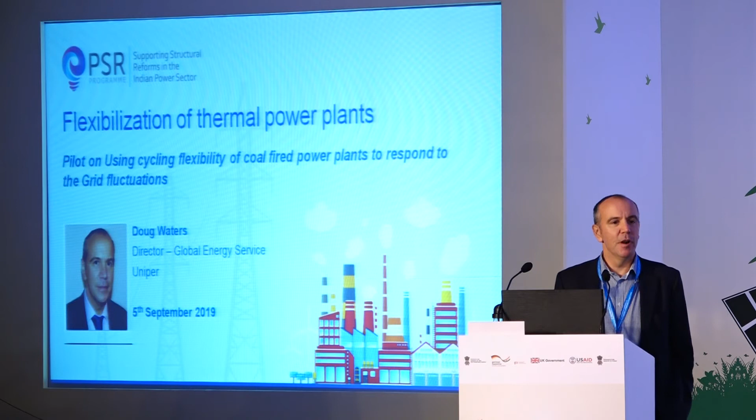Uniper is a power generation company, slightly different to some of the other people on the panel. We have about 40 gigawatts of power plant spread across Northern Europe and Russia, and we've seen a lot of these things happen over the last 15 years. I've personally worked in power stations that have gone from base load to 200 or 300 starts per year. I'm going to summarize some of the things we've seen and also the work we've been doing in Andhra Pradesh on this topic.

With KPMG and through the UK DFID organisation, we've done some work on how to improve the flexibilization of coal plants in Andhra Pradesh, so we have an ongoing program there. I'll describe the work we've done there and Uniper's experience in flexibilization, then what we did at a particular power station in Andhra Pradesh and some recommendations to deliver flexibility, which is now moving into the implementation phase. Finally, KPMG, who lead on the market and policy piece while we lead on O&M and engineering, have come up with some policy and regulatory enablers to make flexibility happen.

A very quick overview of the situation in Andhra Pradesh: it's one of the highest renewable intensive states in India. This graphic shows it's at the top end of India in terms of renewable penetration, which means some coal plant is going to have to flex there before other areas.

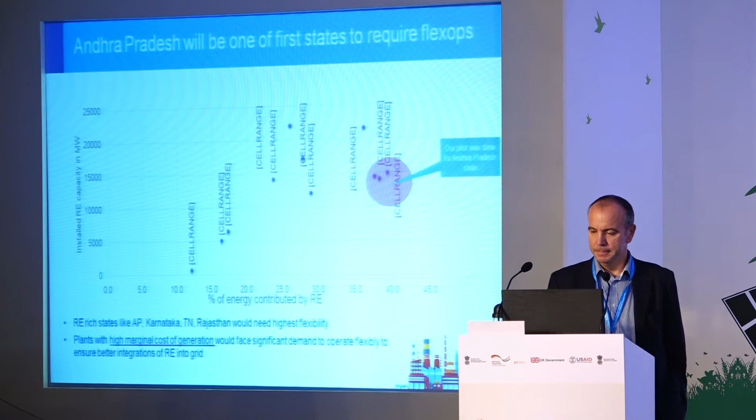KPMG did quite a big market study looking at what was going to happen. There's going to be some increase in thermal capacity over the period, but a significant increase in renewables across the period considered. What the model does is calculate the residual demand shape for the thermal assets. It doesn't look to curtail renewables; it looks to meet demand by putting all the renewables on and then meeting the rest by coal.

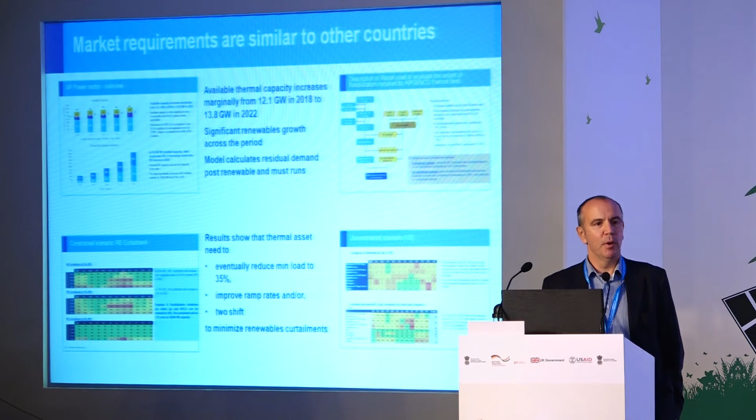What that showed was that the coal plants are going to have to reduce their minimum load eventually down to 35% - not immediately, but as more renewables happen, they need to go further in that direction. They need to improve their ramp rates to meet that duck curve profile you saw earlier, and ultimately they're going to have to start two-shift operations, so daily cycling. That's the market requirement they came up with, and there's lots more in the information pack you'll find after this.

So just a bit about Uniper and its experience in FlexOps, which is why we got involved in this. I've worked at a number of power stations and all of them have eventually had to lead to flexible operation. When you run a power plant, these are some of the things you start to think about: what damage am I going to do?

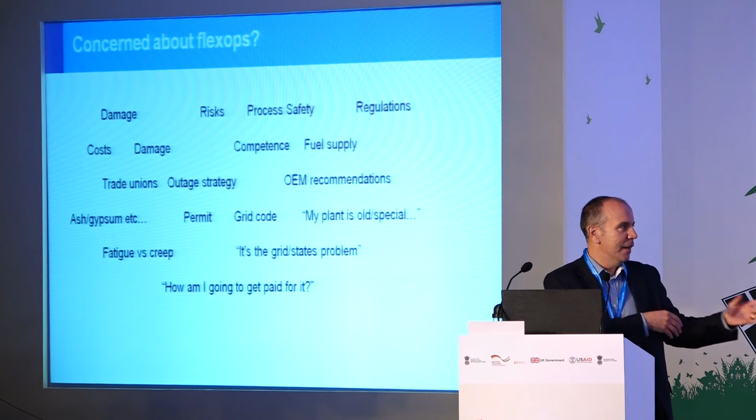That's where the EPRI guys do a lot of work on the material side. What risks am I going to put myself into? As Nilesh said, there are new risks coming along with this. What are my process safety risks, because I'm asking this thing that was built to run base load to do something it wasn't designed for? What's it going to cost me? What's the damage going to be? How good are my people? What's the grid code going to require? And ultimately, how am I going to get paid for it?

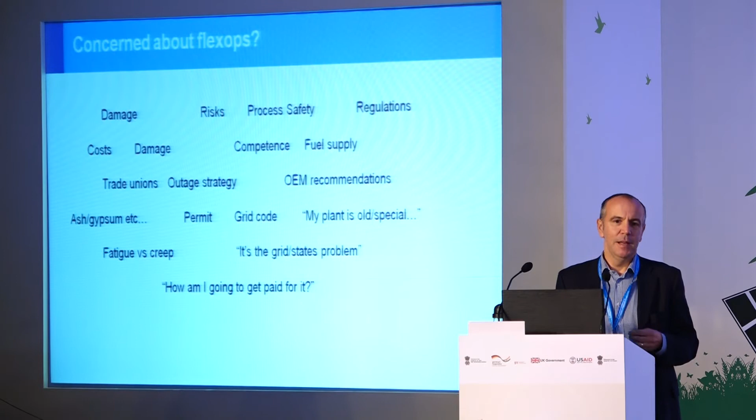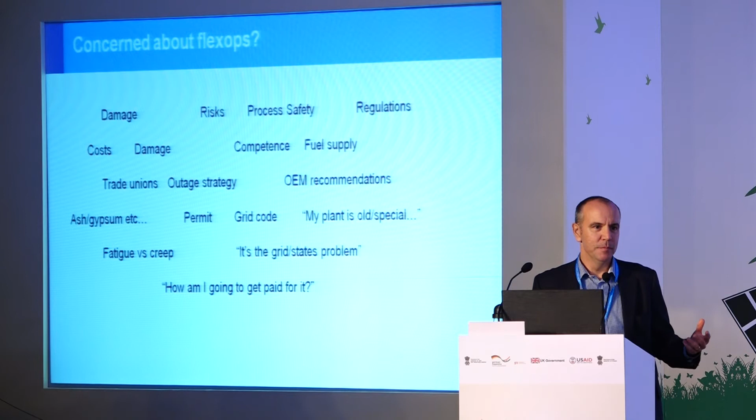I think that's the key issue in all markets: how are you going to pay for flexibility? Not, can I do it? Because as someone said earlier, you can do anything - it just costs money. But ultimately someone's got to pay for it. So within Uniper, we have a kind of flexible operations toolkit, which is what some of the guys were talking about before.

This is ours. It has six main areas. The first one is: what's my market requirement? So as we saw in Andhra Pradesh, it's to lower the minimum load and then use that learning to eventually move into two-shift operation. We're not going for straight two-shift operation, we're going for reducing our minimum load, and ultimately we're going to go for two-shift operation. The next thing is: what do I know about my power station?

Those are the kind of reviews that Steve and Nilesh were talking about. What's my existing power plant potential to deliver? Most coal-fired power stations have huge potential to deliver flexibility. They might need some limited capital investment, but as people have said before, there's limited money to spend on that. But you can do a lot with the plant you have.

But then you need to look at how am I operating my plant? Think about not the plant, but the process. What do my startups look like? How do I control flame stability? How do I lower my minimum load? Which mill groups do I have in service? All of those things. So you need to go through the operational procedures, and that's where a lot of the changes come in.

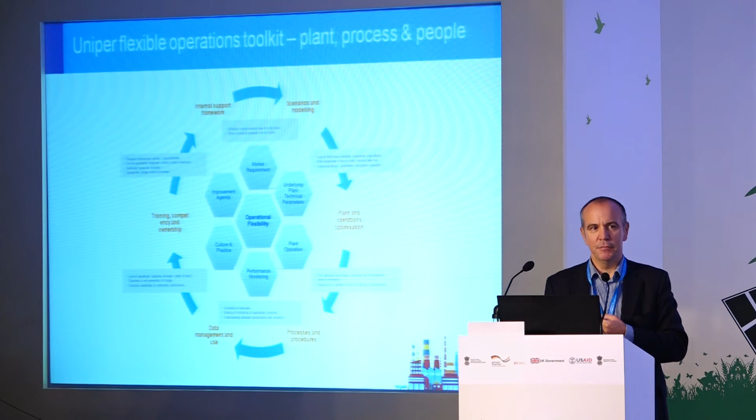Then you need to do some work on performance monitoring, which is what the guys talked about before. How am I going to capture all this data, and how am I going to use it very quickly to make decisions and manage risks? It's no good having a report produced two weeks later—you need it right up in front of the unit operator's eyes.

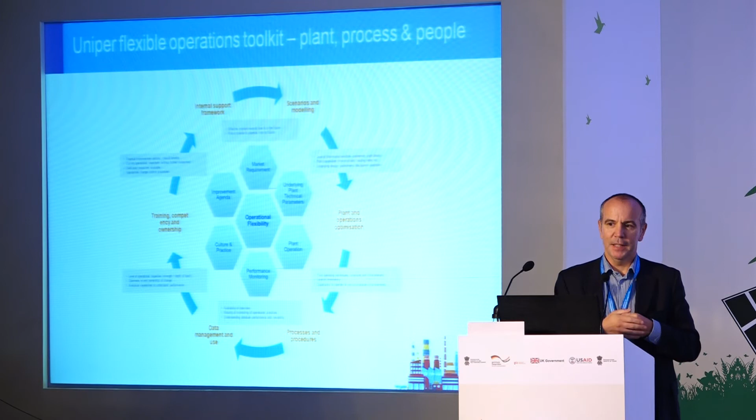Then into the softer ends, but these are the bits where success happens. What's my culture in my power plant about delivering this? If people don't believe it can happen, then your unit operators won't deliver it. So there needs to be some leadership and real engagement with the staff. And then it's not a big leap delivering flexible operation—it's small incremental steps. Within Uniper we say it's a journey, not a destination. Eventually you will get better and better at it.

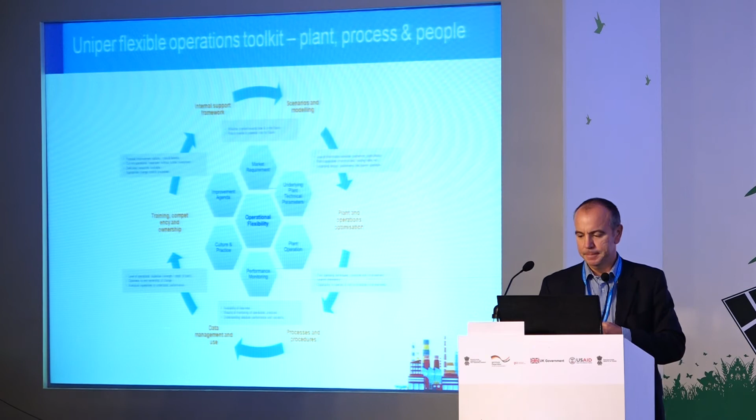So these are some of the things we've done in Uniper at our different plants, from the UK to Germany all the way through to Russia: faster onto the grid, cheaper to start, faster to full load, cheaper to run, faster off, and warmer for longer for the next start. Now you don't do all of those things in one power plant—you do them relative to the market they operate in. So what's important in the market?

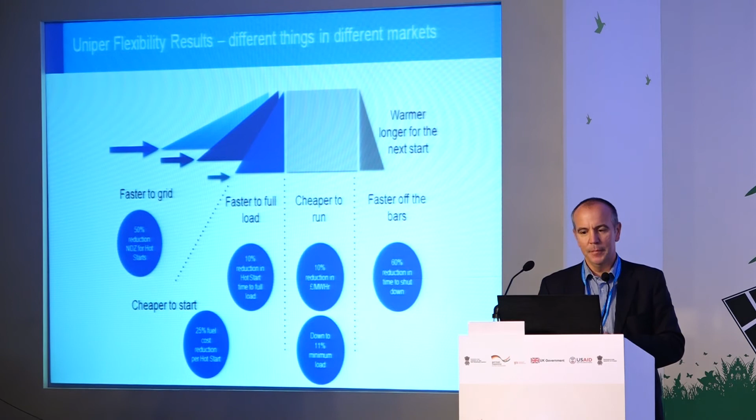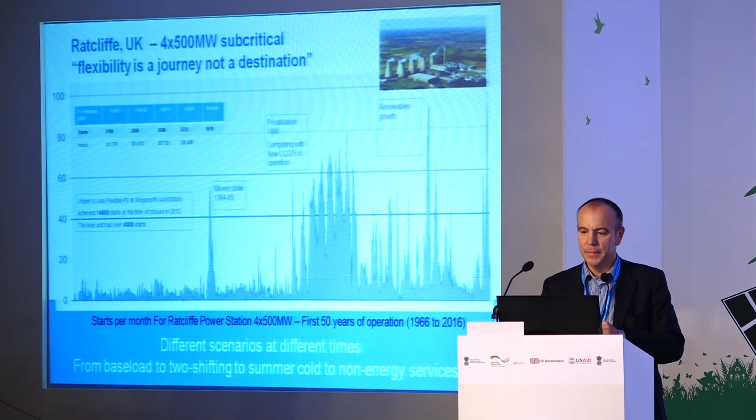But they need to be able to start reliably. So now we're doing around about 100 starts across the 4 units per month, so that's about 25 per unit. So every working day, and cold at the weekend, as someone said.

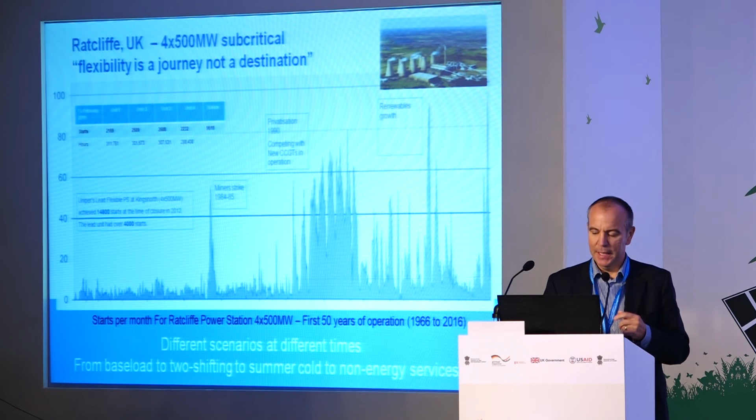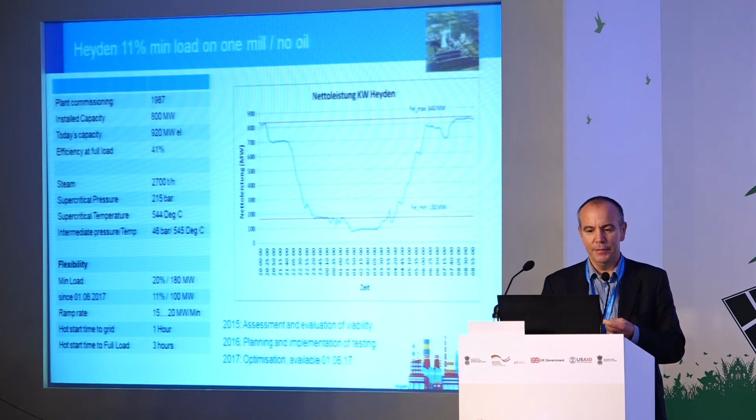This is a different example in Germany. So this is a supercritical coal-fired plant, quite modern by coal-fired plant standards in Europe, 1987. Currently 920 megawatts, and it has a minimum load of 11%, which we achieve on 1 mill with no oil support. Now, we didn't go there straight away.

That was a 2-year program of work involving lots of testing, risk assessment, and so on. And what this unit does is we need 1 hour's notice to come down because we have to get the temperatures down in the boiler. So that's the initial drop-off you see there. And then we can come down for up to 8 hours, down to 11%.

But what must happen, and the grid company needs to understand that, we must come up to 50% load for 3 hours in order to soot blow the boiler, because at that very, very low load, you basically can't do any soot blowing, so you've really fouled up your boiler, okay?

So that shows what is possible when you spend time and thinking about it. Very little capital modification to this plant, maybe a few €100,000 of expenditure to achieve this, but lots of training, and lots of risk assessment and lots of engineering.

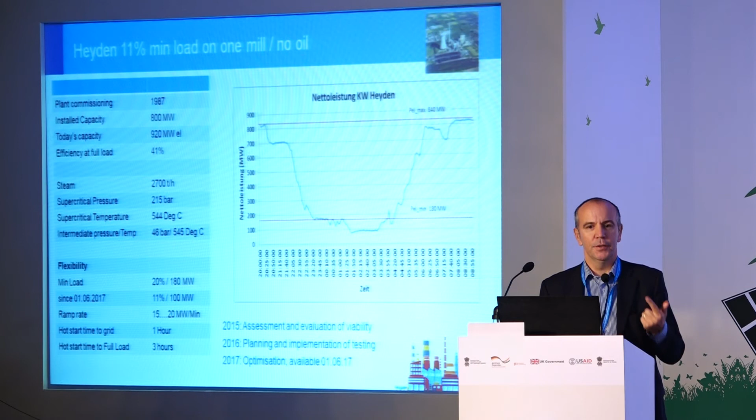So, as with many plants in India, shortage of coal, quality of coal, and the control system's never been tuned below about 60% because it's been running base load.

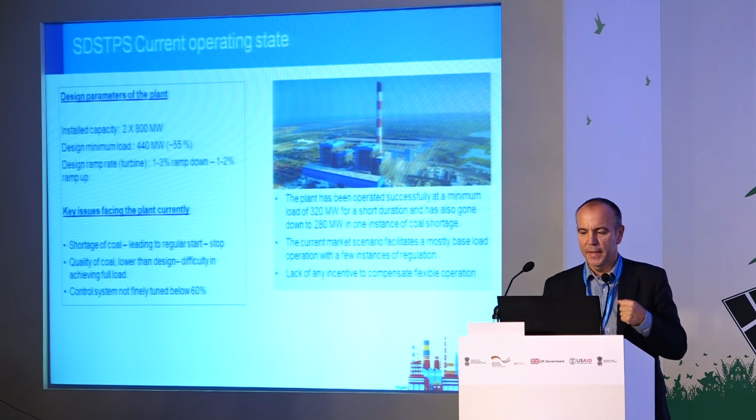So it's achieved by sort of testing and by doing it itself, around 320 megawatts. But they wanted to know how could they go down regularly for longer, and what was the risk going to be, and what was it going to mean for the longer term.

So this project split into 3 focus areas. So the first one is reducing minimum load, the next one is increasing ramp rates, and the final one is about 2-shift operation. Now, in discussions with APGENCO, the reduction in technical minimum was going to be our first starting point, because that's the immediate requirement in that area.

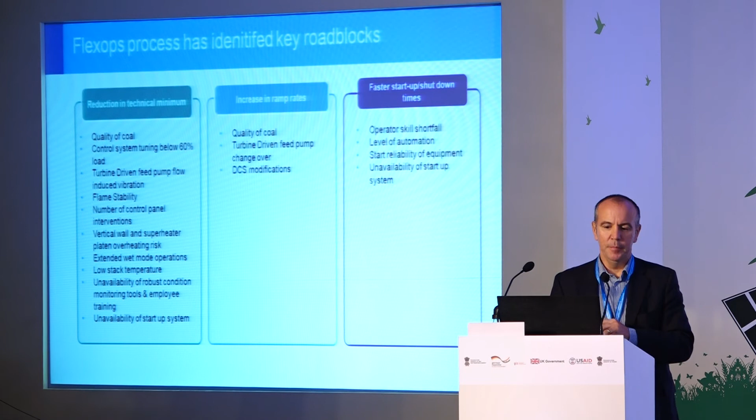So what we learn there, we can then particularly apply in the 2-shifting scenario later. So it's a kind of evolution of a power plant. It's not doing everything all together. And you can see there, these are all the roadblocks that we identified with them in terms of delivering that. So coal quality, tuning of the combustion. So you can read all of that, and those are the things we need to solve before we can release the unit to do other things.

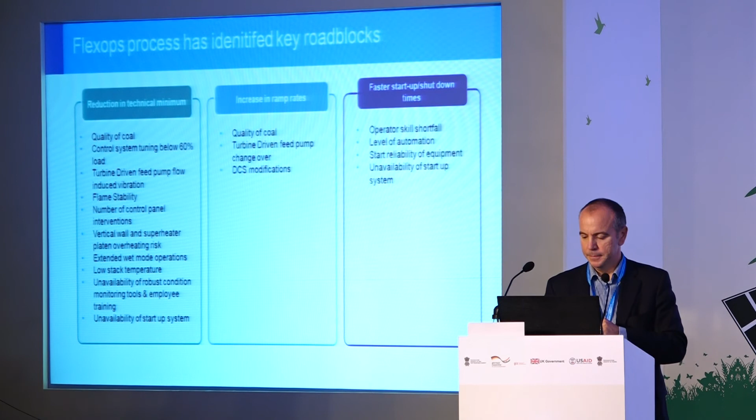So again, we used the Uniper sort of flexible operations model and worked with the power plant to work out when we were going to intervene and what we were going to do. So a lot of it is on the plant and the process. So how are we going to deal with coal quality, flame stability, low back-end temperatures, issues with the turbine-driven feed pump, etc. So all those issues were captured, and then we come up with a mitigation plan.

The other thing that became quite apparent is when you do lots of flexible operations, you need to be able to raise your maintenance defects very quickly, because you need to get that opportunity maintenance done when you have periods when you're not required.

So this plant didn't have a suitable computerized maintenance management system, and as fellow operators of power plants, we felt that was one of the key things they could really benefit from.

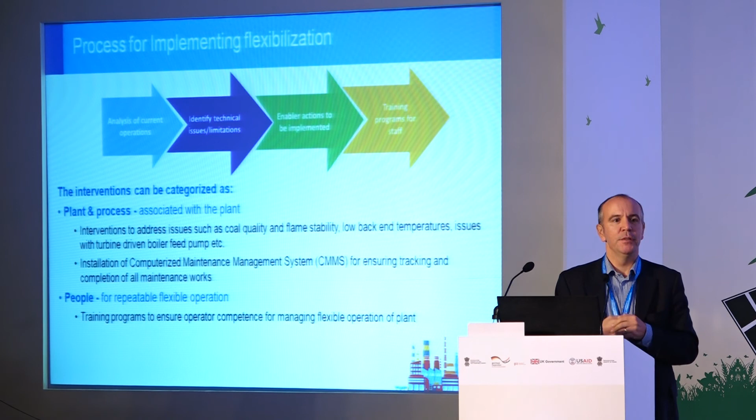And then on the people front, they really need some training programs with the operators. The operators have never seen that type of environment, and about 50% of flexible operations sits in your unit operator's hands. So you need to be able to train them in simulators or in scenarios - what's going to happen, what you've got to do. So a couple of quick examples.

For coal quality and flame stability, we basically said, okay, there's some issues there. We can spend lots of money, or we can spend not very much money. But let's start by spending not much money and see where we get with the solutions.

So the first one is about blending coal and buying new coals and using the fairly crude blending facilities they have on site. And if that doesn't deliver the benefits we need, then we'll go for a full blending facility on site, which will take a lot more money and a lot more time.

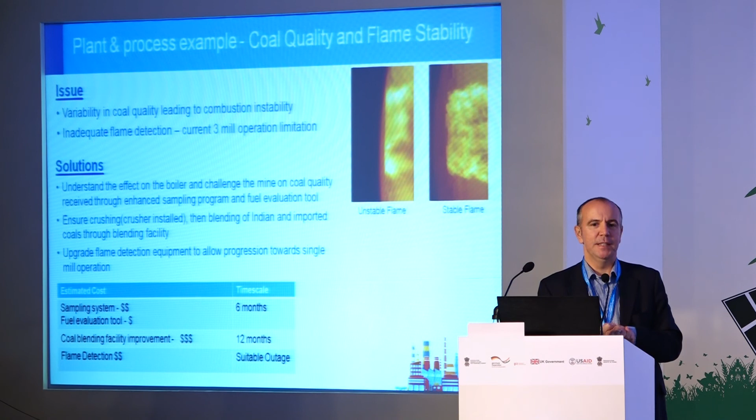Also about the sampling system - if you know what's coming to your boiler, then you know what the issues are going to be. And finally, as mentioned before, flame detection wasn't adequate, we felt, for what was there.

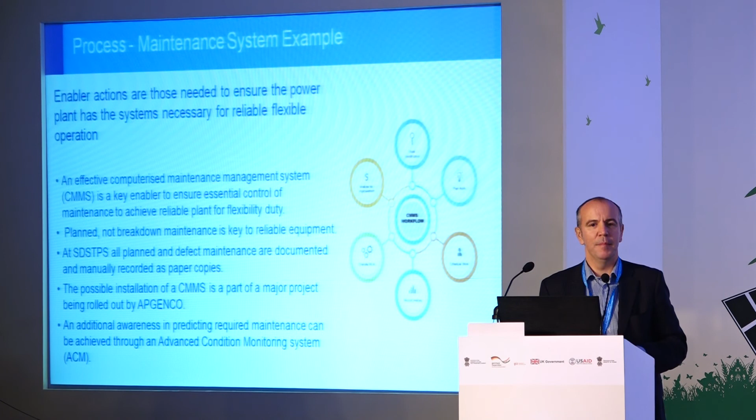Next one about the maintenance management system. I won't go into any detail on that, but essentially we recommended that they needed to install a new one.

And then on training - Uniper trains many of the operators in the UK for our own power plants and all our competitors. So we're going to develop some training packages for the guys out here in India in order to deliver that flexible operation.

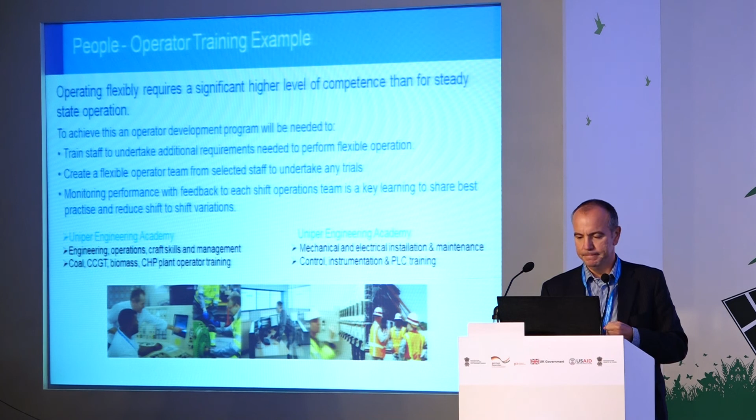And then there was a lot of interest in going straight for single mill operation, and we explained that's not the way you do it. You start with your current position and you work down through numbers of mill groups.

So the first implementation target is for 280 megawatts using 3 mills, and that's being planned at the moment. There's a number of actions that need to be done, risk assessed and signed off, in order to release that unit for 3 mill operation at 280 megawatts.

After we're comfortable with that, which might take 3 or 4 months, we then move on to the next target, and all the way along. That's why in Germany it took 2 years to get down to single mill operation.

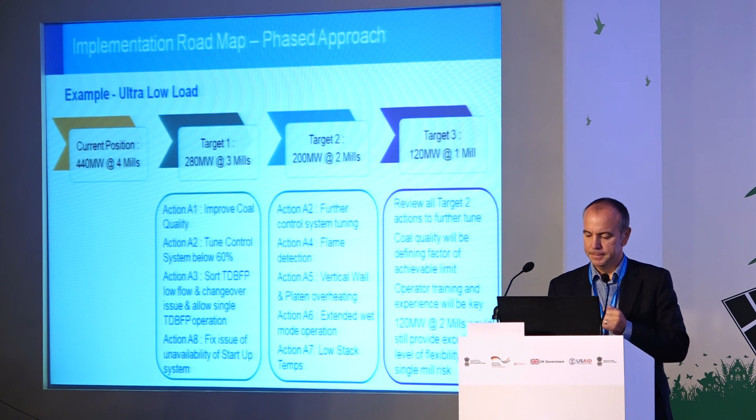A key important one is there needs to be some form of economic incentive in India for people to operate flexibly. Currently, a lot of plants are just paid on energy through a PPA, maybe with some adjusters for heat rate and things in there. There needs to be faster scheduling intervals.

You heard about 5-minute balancing. Some countries are talking about going to 1-minute balancing now. You're not going to go straight there in India, but you might go for half an hour to start with.

And ancillary services - what do we mean by ancillary services? Because every grid code has different meanings. And what do we need to deliver in India?

The whole market design needs to move away from a PPA type structure into some form of wholesale traded market that provides incentives for behaviour.

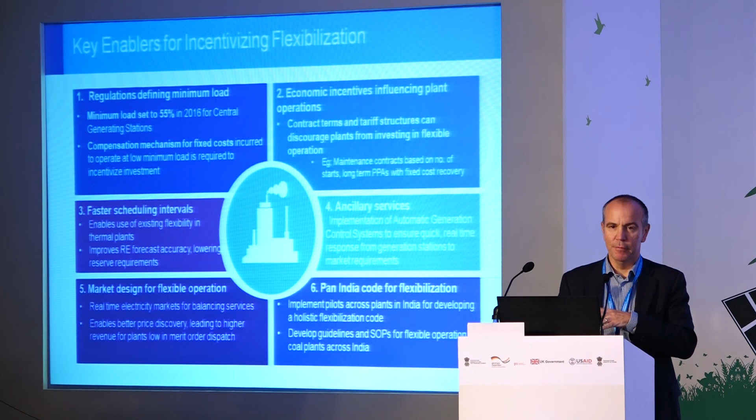And the final thing is some sort of code for the power plants to follow, standard operating procedures for flexible operation. Now, whether that's across a fleet of power plants or a different type of power plant, it doesn't really matter, but there needs to be some rules, because if it goes wrong, it goes badly wrong. And so you want to avoid those things. And that's it.